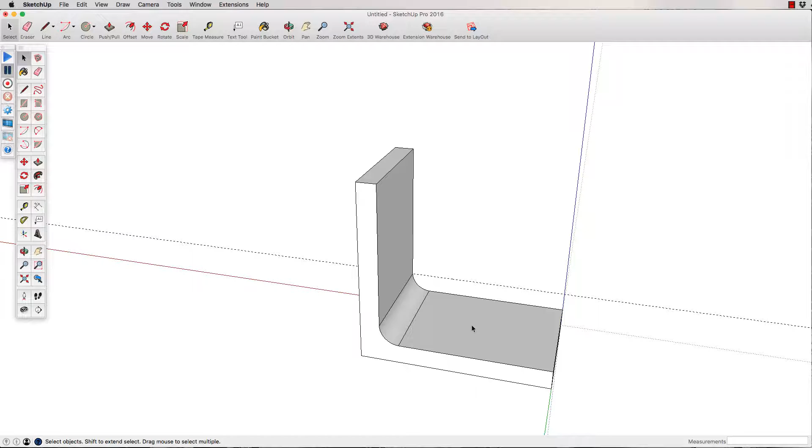Okay, so I'm just going to quickly show you one way to do the cylindrical part of our shaft bearing. And the first thing it's wise to do, now that we've got this section mostly completed, I've still got to do the radii on the front here, this one here, and put a couple of holes in it. But we'll just move on to this next section because this has caused a few problems.

Firstly, what I'm going to do is I'm going to select that and make it into a group. I can make it a component, but I'll make it into a group, because I don't want to edit this at the moment. Then what I'm going to do, I'll just move around here a little bit. I'm going to put my circle on.

Now, from looking at the drawing, I know that this component here is 30 millimeters wide. And I also know that the outer diameter of the cylindrical section is 30 millimeters. So what I know then is that if I find the midpoint, it should meet up at that point there. The circle should actually match the width of this piece here.

Now, another thing too, and this is a really important trick when drawing multiple circles along the same axes and planes in SketchUp. And for this object, I'm going to need to draw three. I've got the outer diameter, I've got the diameter of the inner hole, and I've also got the rear diameter. So I've got three circles I have to draw to create this piece.

And what's really important is when you are drawing circles that relate to each other, as these three do, it's very important that you create the circle by drawing out along an axis line. So in this case, I'm drawing this along the green axis because it allows me to intersect with this object here. So every other circle I'm going to draw, I should draw on the green axis.

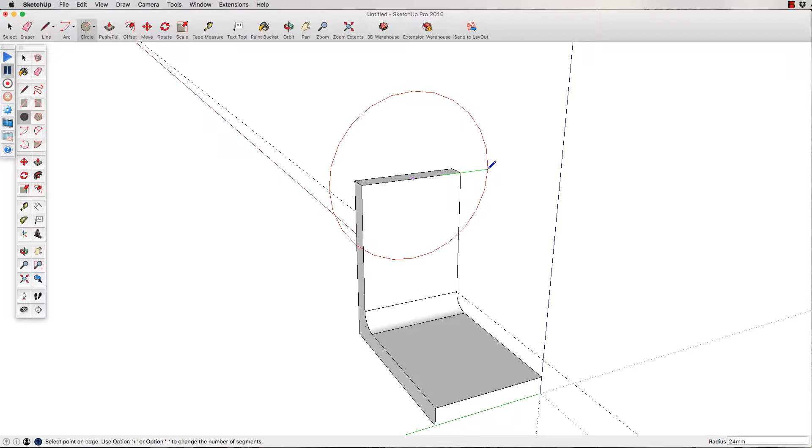And the reason why is because all circular or curved surfaces in SketchUp are actually made up of a collection of straight lines. And in this case, this circle is actually made up of a collection of 24 straight lines. And what I need is I need to have the intersection points of those straight lines lining up. And if I don't consistently draw my circles on exactly the same axis, they will not line up.

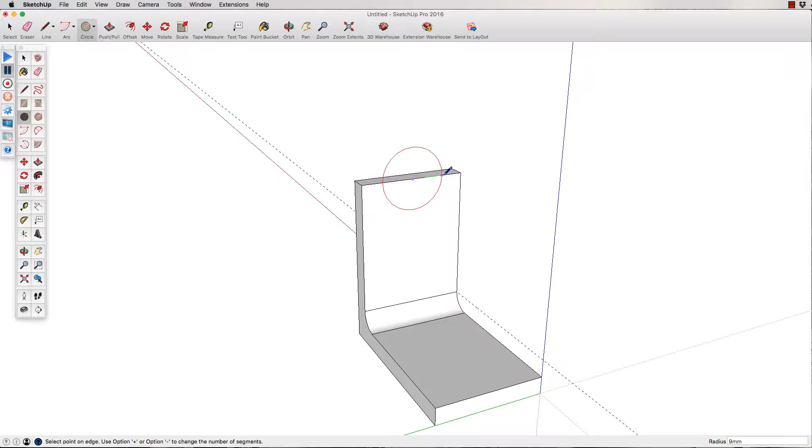And particularly when it comes to doing the radius at the back of this object, it's really critical that these intersection points line up because I'm going to use those to draw my radius on the back of this section of the drawing. So here we go. First circle. There it is.

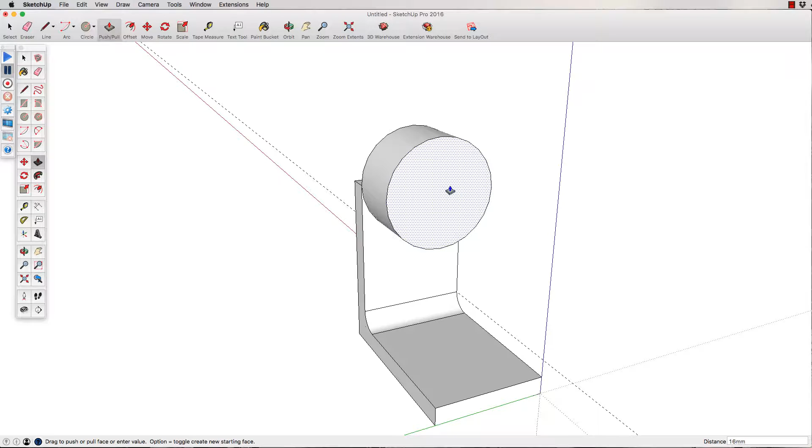Now, I know from my drawing that it extrudes out from the front of this plate object. It extrudes out 18 millimeters. So I'm going to push it, 18. And I'll go around the back, and I know that the overall length of this piece is 27 millimeters. So I know that's 5 thick, and I also know that there's another radius of 4 on the back. So it needs to come out 9.

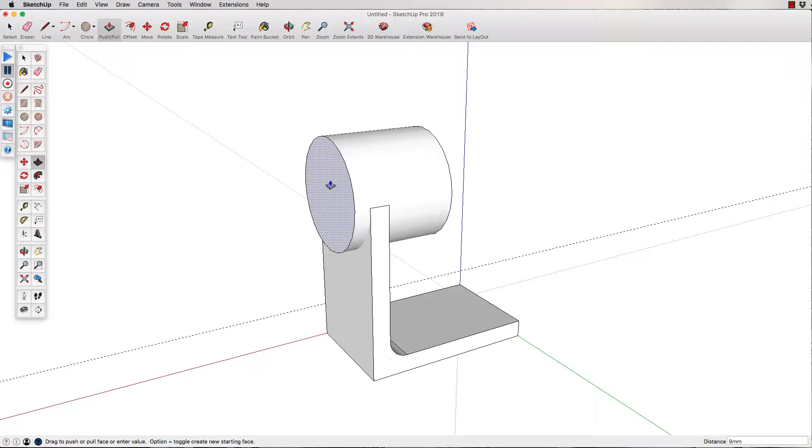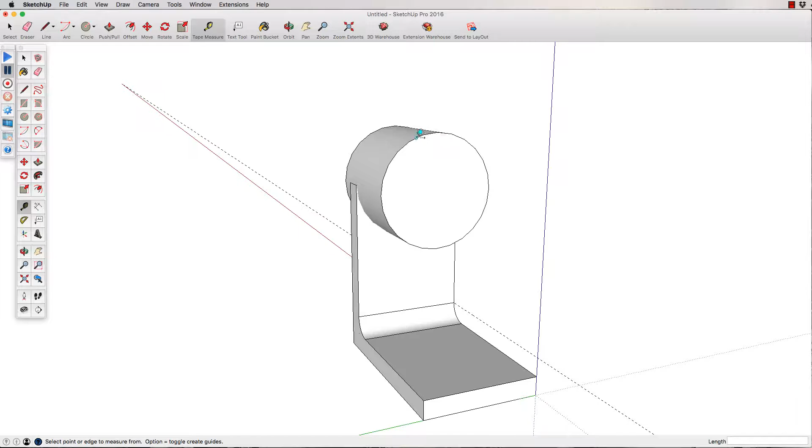All right. So the next thing we can do, I'll come back around the front. We know that we've got a hole that goes through the middle of it that is a diameter of 15. Now we need to find the center point, and sometimes, see, it just found it then, but sometimes it doesn't like clicking on it. So a way to work around that is we can click there, and we can just find an endpoint to one of these segments. This is with our tape measure, and we can click in the middle. We can do it again. See how it's creating? There we go. So now it's found a center for us.

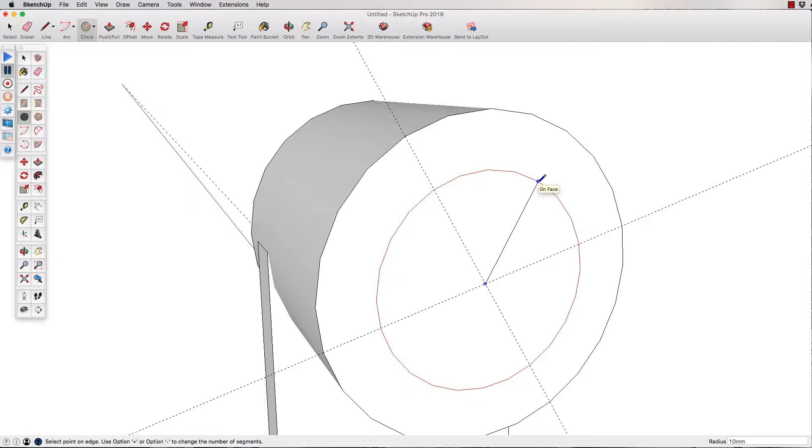So, circle. Now I have to remember that a diameter of 15 is a radius of 7.5. There we go. And we can now push this. Now we know that the length of this is 27, so we can just say 27. And we'll go around the back and have a look.

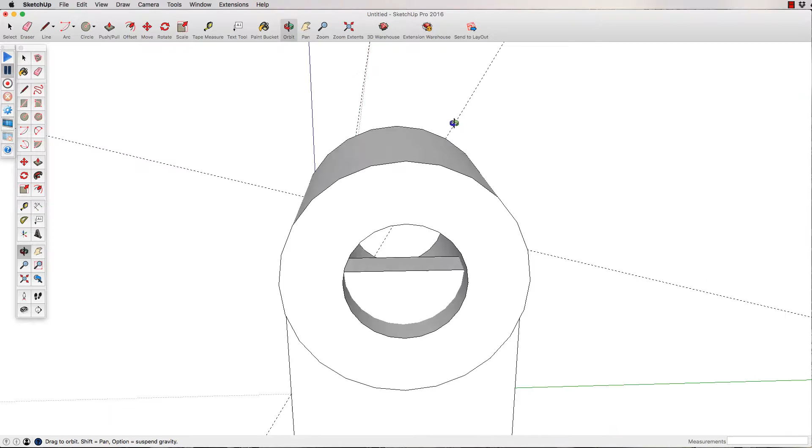Now see how this piece here is intruding in our circle? We'll deal with that later. We don't have to worry about it too much now. So at least we've got a circle going all the way through. Now so far so good.

So we're getting into the tricky bit now, because what we can see at the back, there's an outer diameter of 22, and then there is a radius of 4 between this piece here and the other outer diameter. So we'll do this. In fact, what I'll do, I'll get rid of the guides that we have, because we don't need those, and we're going to put a few more in. So we need to find the center point out here. So doing the same technique again.

There's the center point. So we'll put in a circle, and it is a diameter of 22, so it's a radius of 11.

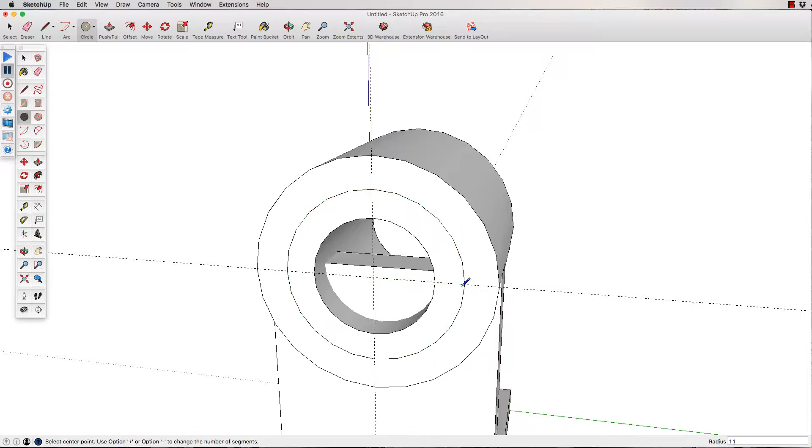Now let's not make that silly mistake. Remember how I said before, we have to have this along the green axis, because we need to make this rib for the radius. So here we go, 11, and I'm along the green axis. Okay, so now I need to push this section here back 4.

Let's just orbit around and see what we've got. That looks good.

All right, so now we need to make this radius, and this is where it was critical that we got all these segments lined up. So again, I don't need those guides, I'm going to delete those. I'm going to start with some new guides.

So you can see there's an intersection point there, and there's one there. So if I start here, start there, it should go along the red axis, 4 millimeters. Yep, it's misbehaving. Go up the blue. There we go, that worked.

That might give us all we need. Basically what we're looking for is some starting points for our arc. Now for this one, I need a 2-point arc, so from there to there.

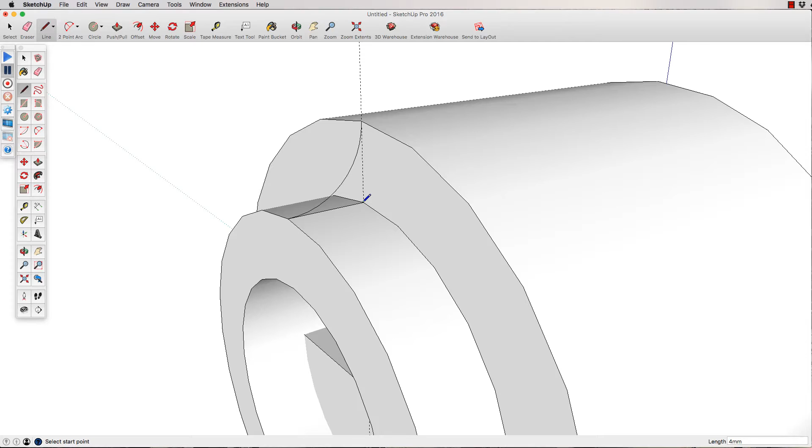There we go, there's our tangent. And then we need to draw a line that goes from there to the intersection there, and then from there up to there. There we go. We've got our rib without too many problems.

So the next thing now is the follow me. And I know some of you guys are experts at it, but some of you have got some interesting ways of using it. This is the easiest way that I've found.

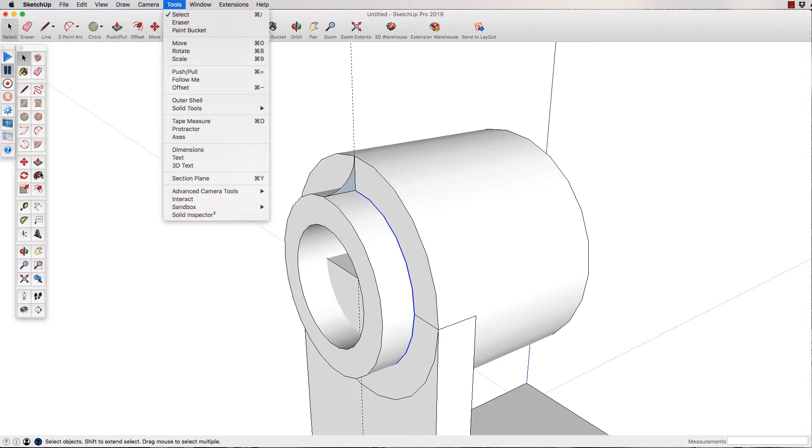So we go select. We select either the surface or the line that I want to follow around. In this case, I want this to go around this line here. I then click on my follow me tool. Now I can either get it from here, or I can go up into tools and follow me. So I select my follow me, and then the thing that I want to rotate around, I then wait till I've got the little dots on it, and then I press the button.

There you go, let's have a look at that. That's nice, see how it all lines up nicely? There's no little funny bits of geometry.

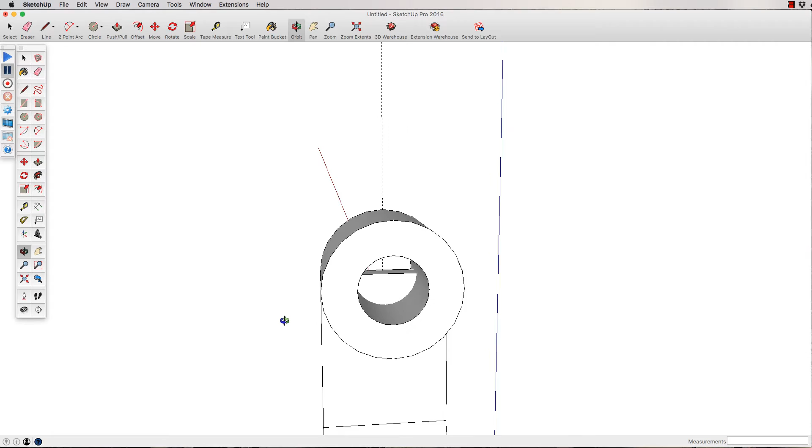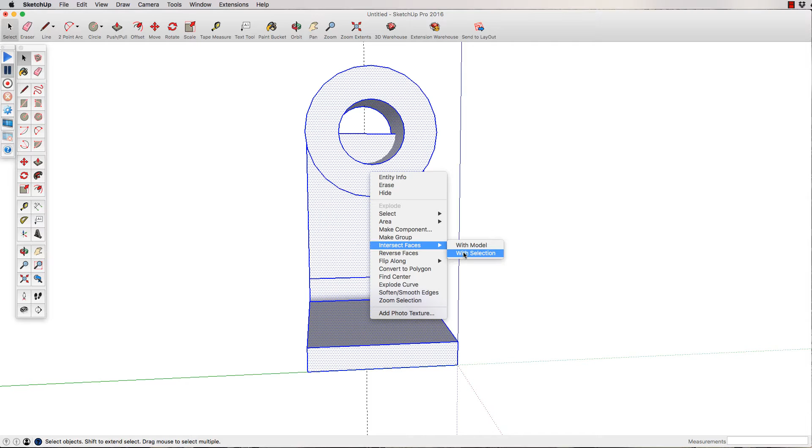Okay, now we've got to get rid of this bit going through the middle here. So what we'll do is, firstly we have to select that group, and we're going to explode it. I'll just get this more in the middle. Then I'm going to select everything again, and I'm going to intersect faces, and I'll go with selection. There we go, so that's intersected faces.

What that now allows me to do is I can go in here and I can delete this out. But I'll show you, it's not perfect, but it's better. So I can delete that, delete that.

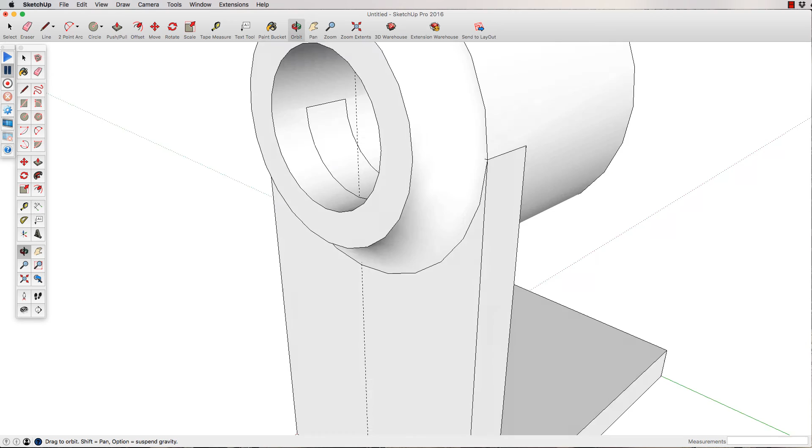Now I still have these lines in here, and this is where you can get into some strife. It just depends, and so it's not critical for you to delete all of these lines. But let's have a go and see what happens.

So far, so good. Sometimes what can happen is the line can be connected to some other form of geometry, and next a whole face disappears. So you do just have to be a little bit careful with that. But so far, so good.

But to be honest, if you ended up finishing your model with some of these lines, see, exactly, that's what I mean, this sort of thing can happen. So I might have to leave just a little bit of it in there. Yeah, it seems to be this line here.

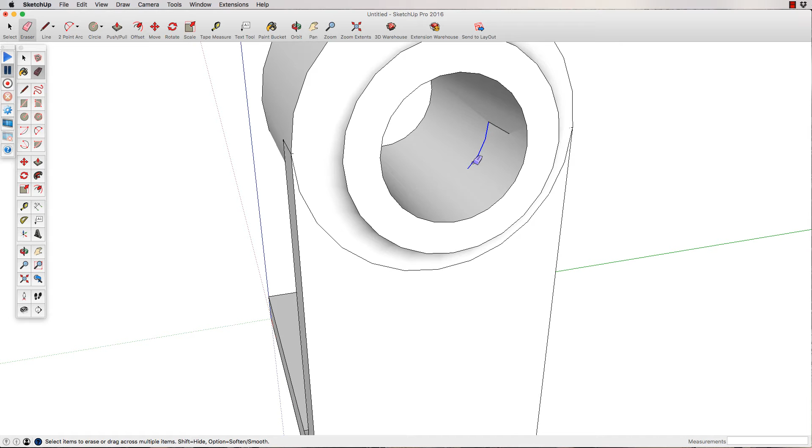If I go right in close, you can see, I might even be able to fix that actually with a rectangle. Let's see if we can. I think I kind of fixed it, but not really, because that's not going to work. I've now got these lines in here.

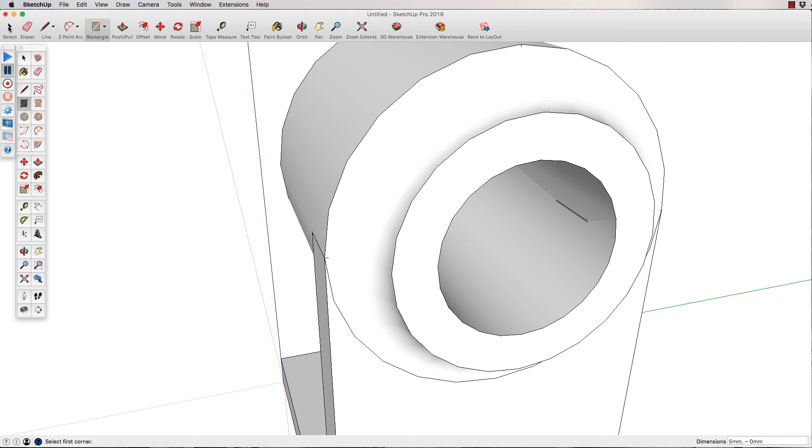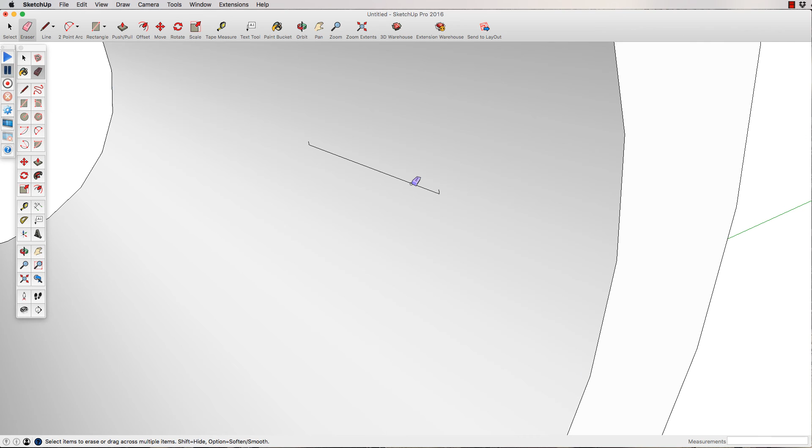What I could do actually is I could go back out, select again, and try again to intersect faces. Okay, let's go in and see if that did anything. No, it didn't. So we won't worry about that, it's not really that important.

So there you go, that's a good way to get this section done. But I think the main tip in there is about how, if you need to draw multiple lines, the best way to do it is to make sure that you always draw them out along the same axis, whatever that axis is.